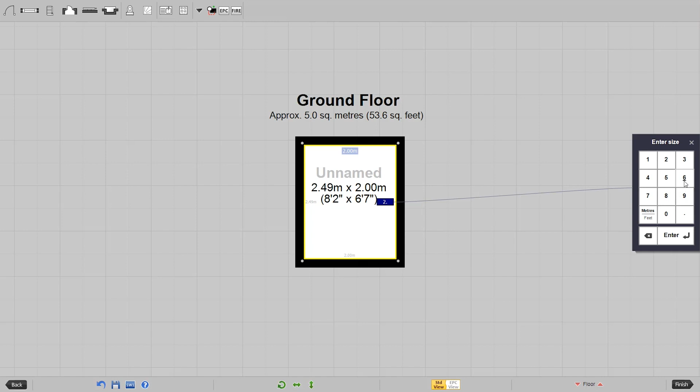Alternatively, once you select Quick Draw, you can add a room measurement before placing the room. Using your keyboard number pad, first enter the width measurement and hit enter. Then enter the depth and hit enter. Move the mouse cursor and your room will appear. You can now move the room and click it into place.

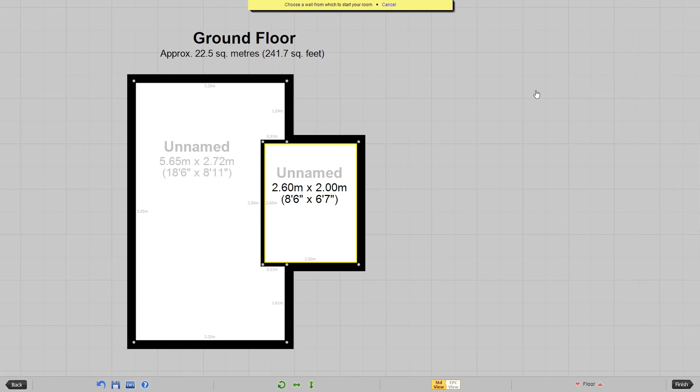The third drawing method is wall by wall. Tap the blue button and then tap the wall you wish to start on. Then tap one of the starting points and a wall will appear. Using the number pad, enter the wall measurement.

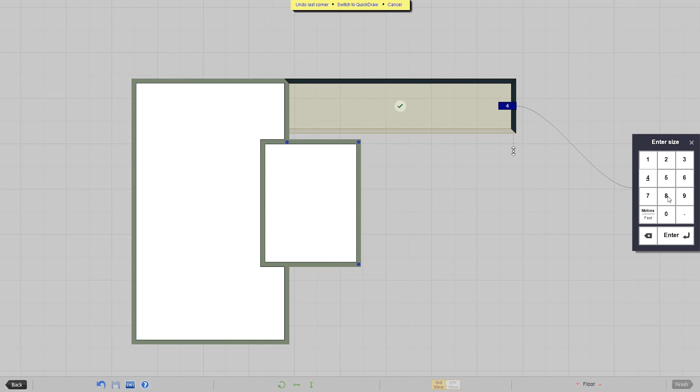To start your next wall, tap on the plus symbol. Using the white arrow, you can set an angle if needed. Now repeat this process until you get back to the start. This will then complete your room.

Keep an eye on the auto-complete option. It will try to offer you a solution to complete your room. If it has the right solution, tap it and your room will automatically finish.

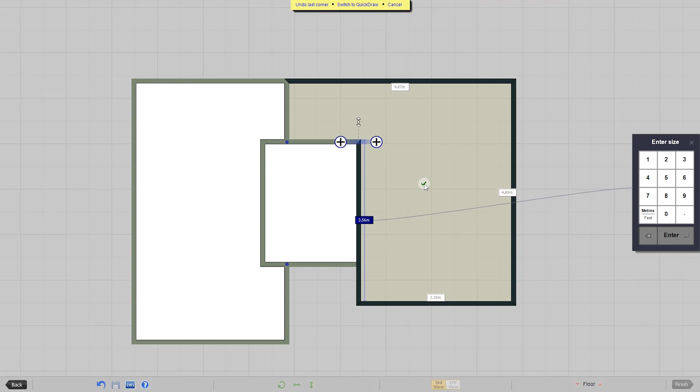When using Quick Draw, you will find that it can mould around existing rooms you've already created. This is especially handy to fill awkward landings and hallways of strange shapes. Tap, hold and drag, just like creating a square room, and Quick Draw will fill in the space.

Also, you can create rooms inside other rooms using Quick Draw.

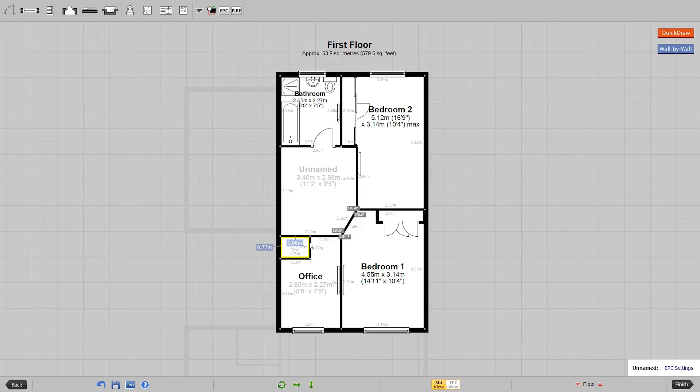Corners can be made angled or curved. Tap on a corner point and select each option from the pop-up menu.

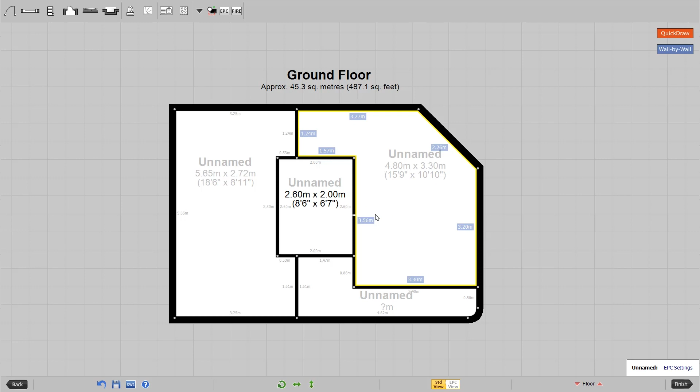You can split walls by tapping on a wall and selecting the split option, or simply double tap on the wall at the point you wish to split it. You can also manipulate the walls on your plan if you need to make any changes.